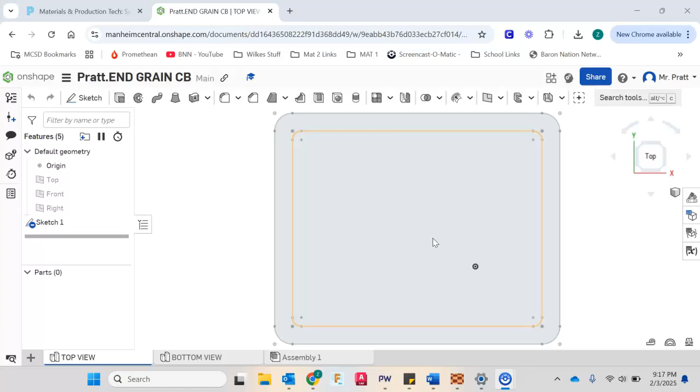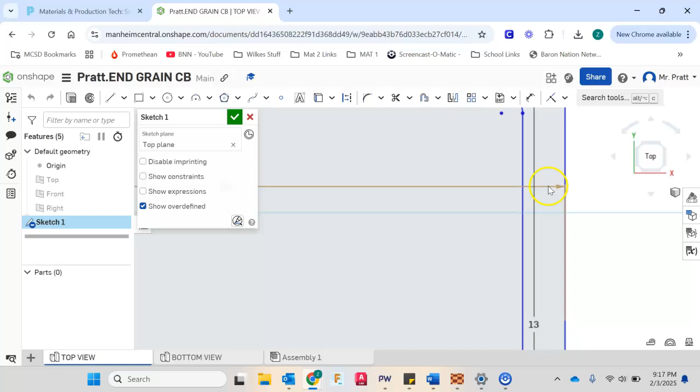Obviously we talked a little bit about in class how the overall size of your cutting board cannot be any bigger than 16 inches in length by 13 inches wide. And so with my design here, I'm going with that max size that we're allowed. Just to open up the sketch so you can see that, I got 16 inches by 13, and I've created a groove that if I were to measure it is an offset of an inch. So that's really important to pay attention to, especially when we start talking about grooves and the size of the bits that you would like to possibly use for that.

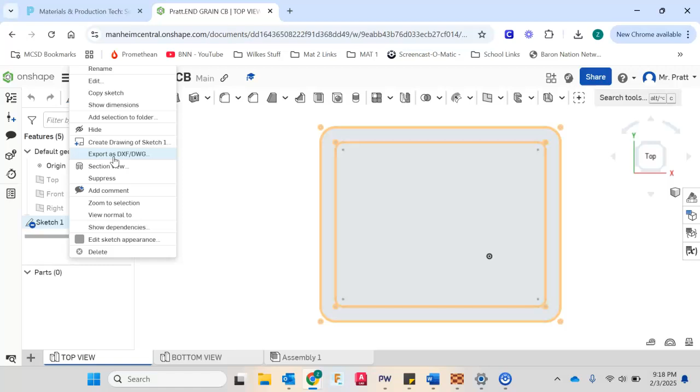So with this all said, we need to first export our design. Just as a reminder for you, when you're exporting a sketch in Onshape, you're right-clicking on Sketch 1 or whatever sketch number you have there and exporting as DXF/DWG. So this information is always available to you on the whiteboard, but as a reminder for you here, we're going to go ahead and make sure we include our name, and of course, what is the part name? In this case, I like to call this End Grain CB Top.

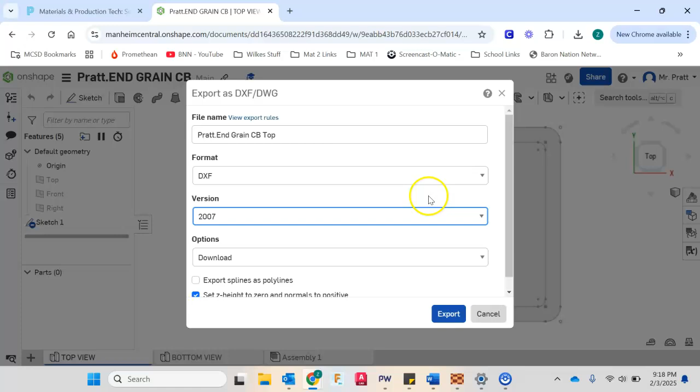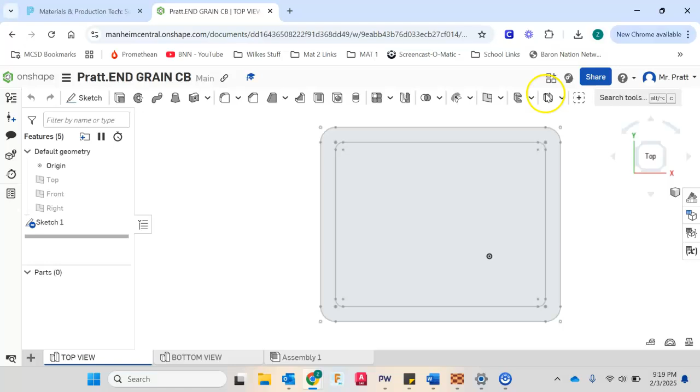Format, we're looking at two different options. DXF, though, is the preferred option here in class, and then our version is 2007. So that's just the year of the DXF file. It's going to get downloaded to your computer that we've assigned you here in class, so please make sure that you're using the appropriate laptop to download Onshape sketches as a DXF so you can upload into Partworks. So we're going to export that, and that will show up in our downloads, and then we'll be able to move to the next step. So you can see it's popping up there.

So let's go ahead and open up Partworks now. We're going to create a new file. And so final size of our board is 16 by 13 for my example here. So go ahead and put that in. We'll also put a thickness. Our final thickness can't be any smaller than 1.25 inches, so 1.25, and then we'll click OK. So that's done. The job setup's created.

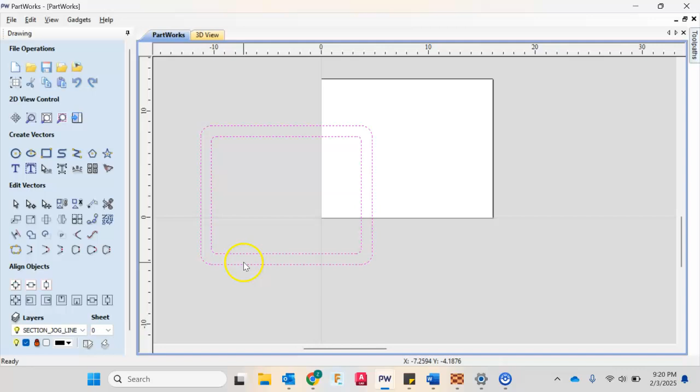We can go ahead now and import our sketch that we created in Onshape. Remember, it's not File Open or even clicking on the little folder icon here. It's really important that you click on the right icon. So it's the fourth one in the top row called Import Vectors from a File. Vector simply meaning lines. So we're going to click on that. It's going to show up in your Downloads folder, so you can see my latest item there that I downloaded. We'll click Open, and it shows up off to the side here. No worries. We can simply center this in Material. So everything's highlighted. We'll click under Align Objects, the first icon available, Center in Material.

So once I've done that, I'm going to deselect what I just had selected there. And to make things easier for us, we're going to join our groove design together. So we're going to hold down Shift, and we're going to select all the lines that we would like to have joined to create the shape of our groove. So for me, I just went with a simple rectangle here. Nothing major, and this will allow me to maximize my surface area where I can cut without having that groove possibly interfere with whatever I'm cutting on it.

Okay, so I have two adjacent lines selected. I'm going to go under Edit Vectors, and I'm going to select Join with a Smooth Curve. I like this option because it does allow the program to keep the radius, especially at the corners there, rounded without creating an additional straight line. So we'll go ahead and keep doing this all the way around. Notice that I'm only adding one additional line segment to the mix here.

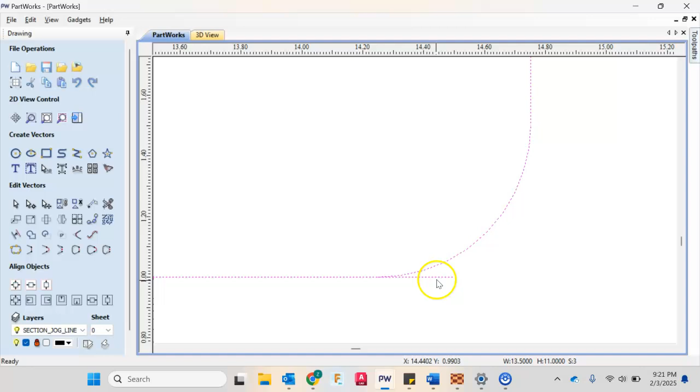It's really important, and I'm noticing that I have a little bit of an error there. So we're going to hit Undo real quick. Sometimes we get a little mistake happen. We're going to see if we can fix that. Yep, perfect. I can join that together with a smooth curve. All right, keep moving along here. So it's really important you pay attention to the order in which you join lines together. Sometimes line segments have a mind of their own, and Partworks does as well. So we want to try to get that shape the way you wanted it in Onshape now in Partworks. So now when I left click, it's all joined as one simple object, in this case a rectangle with rounded corners.

Now you could be thinking, well, why can't I just draw this in Partworks? And the answer is you can, but if you have a more complex shape, it's better to draw this in Onshape and then you can bring it into the program. And so that's why I always recommend that you do that to begin with.

So I have my object here ready to go for the next step, which is creating a toolpath. So we're going to close out of the drawing tab and we're going to open our toolpath tab. There's a couple different toolpaths we could use for this. However, I think the easiest option is going to be our profile toolpath. So we're going to click on that icon. This is where you're going to have to choose your cut depth.

I like to choose a depth between 1/8 inch to a little bit bigger. 0.125 provides enough depth that you see a groove. However, it's not like a significant depth. If you're like, I think I want it a little bit deeper, you could definitely do that, 0.25, maybe 3/8. I wouldn't go any deeper though than 3/8. So we'll go 0.25 just for this example here. Remember, you got a pretty significant thickness of a cutting board, so you have the ability to go a little bit deeper than maybe you would have done in another project.

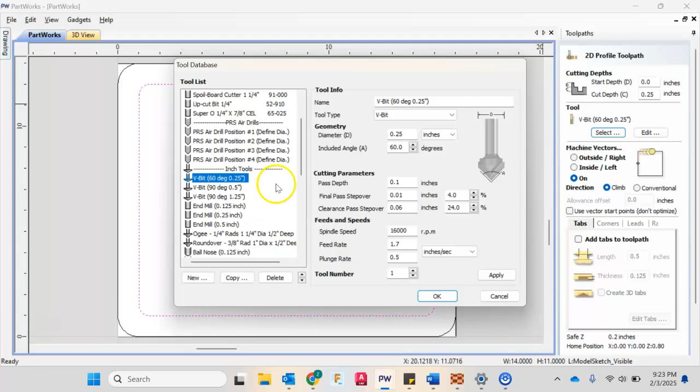The next thing we're going to choose is our tool. So what are we going to make this groove with? So we have two different types of bits that you could choose from. If you're somebody that wants more of a square groove, you could use an end mill. A 1/2 inch would be the size that we have available. We could also go to 3/4 of an inch if you're thinking I wanted it a little bit wider than a 1/2 inch. So that's a possibility.

Another bit that you could choose from is called a ball nose. Well, we have 1/4 inch. However, I think that's a little too tiny. We could go to a 1/2 inch, which would definitely work for this project. And then the other size that we do have is 1 inch.

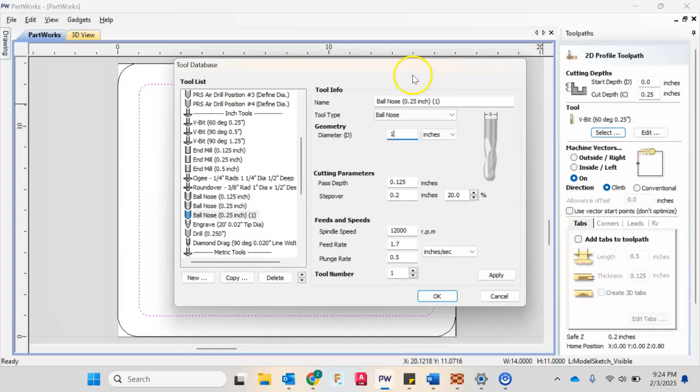Just so you know, depending on your groove and how you drew it, keep in mind the bit is going to follow this line. So half of the bit will hang over the edge to the right, and half of it will go to the left, following that line on the center of the bit. So if you only have an inch space here like I do, that means you only have a 1/2 inch of material left between the outside edge of the groove and the outside edge of the board.

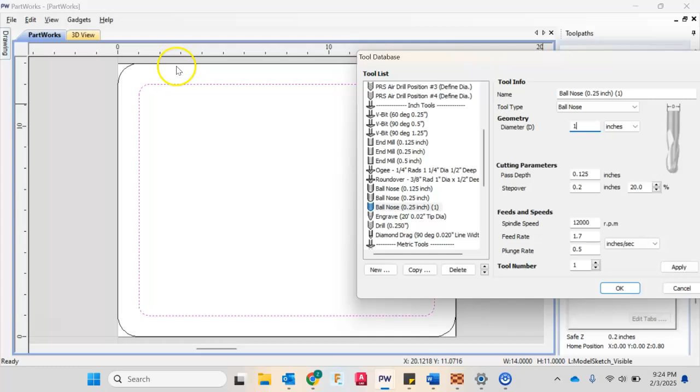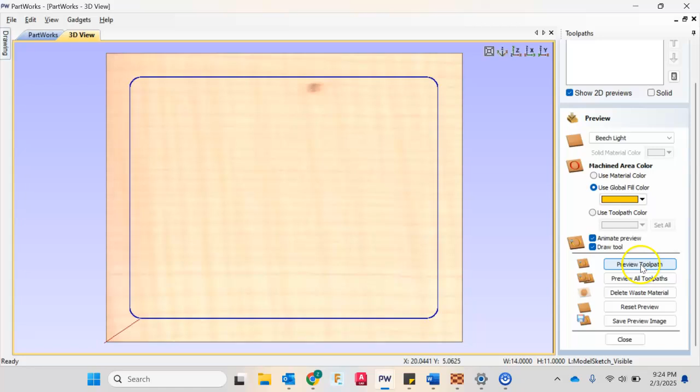So just to give you an idea of what that might look like, I'm going to show you my example here with a 1 inch diameter ball nose bit. Pass depth, fine at an 1/8 inch, so we don't need to change that. So I'm going to click OK, and I'm going to choose my machine vector is on, and I'm going to click calculate. And so when I do that, I'm able to preview my toolpath, and you can see exactly what that is going to look like. Not a lot of material between the outside edge of the groove and the outside edge of the board.

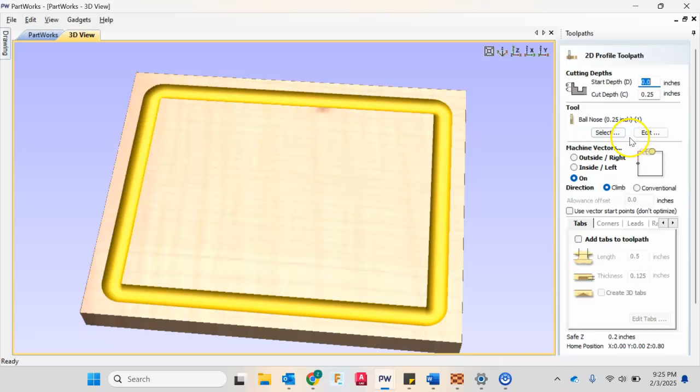So is this the right thing for you? I can't make that call, but I can tell you that for me, I'm not too keen on that little material left behind after the CNC process is done. So I'm going to go ahead and change that diameter for my bit from 1 inch to 0.5, and I'm going to click OK, and again I click calculate. Now when I do that, you'll notice that nothing changed on my view here.

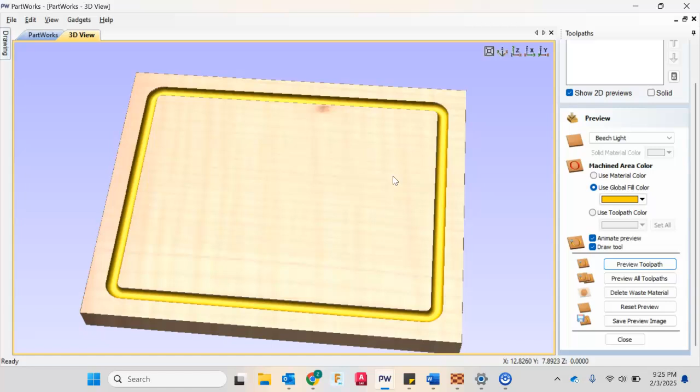I need to go back and hit reset preview and preview that toolpath, and there you can see I think that looks a little bit cleaner, a little bit better in my opinion for my example. If I had my rectangle in a little bit closer to the middle of the board, I think the 1 inch might look okay, but I like that spacing that's left behind between the outside edge of my groove and the outside edge of the board. So just something to keep in mind as you're thinking about your groove designs.

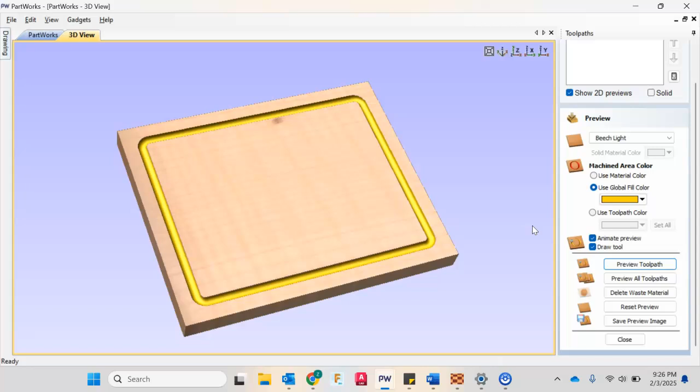A couple different bit options as far as ball nose or end mill, as well as the overall diameter of the bit and your depth. So lots of things to choose from if this is something that you are going to include in your project. Hopefully that helps. If you have any questions, watch this video again, ask your classmates, and by all means ask your instructor as well.